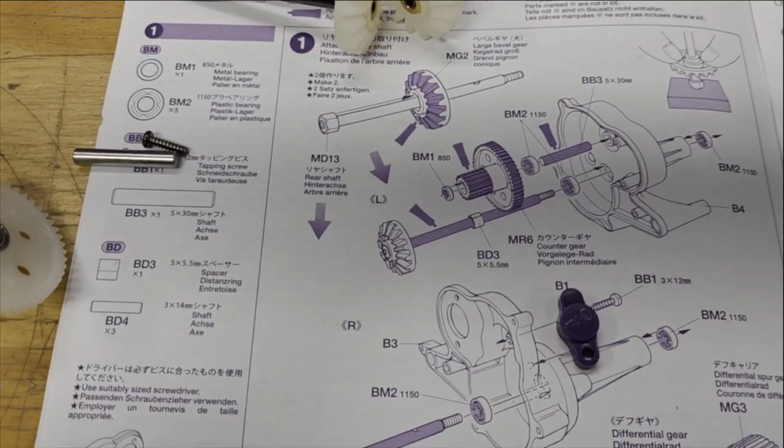All right guys, as we can see here, step 1 is fairly chock full of stuff here. So I went ahead, I want you to make 2 of these guys, which you get 2 and 2. This just slides on as a hex.

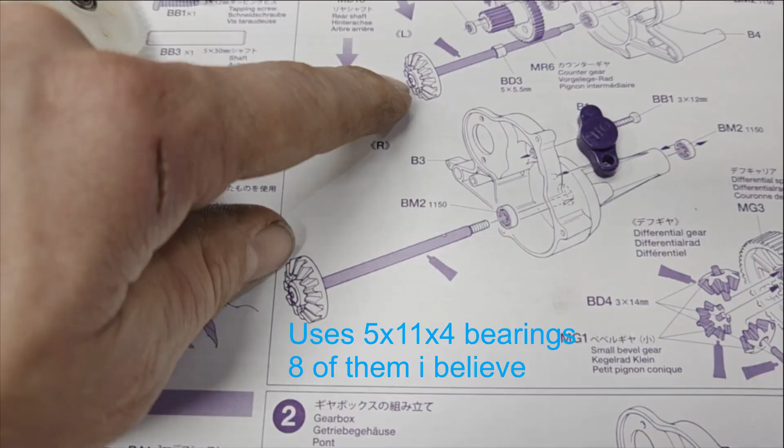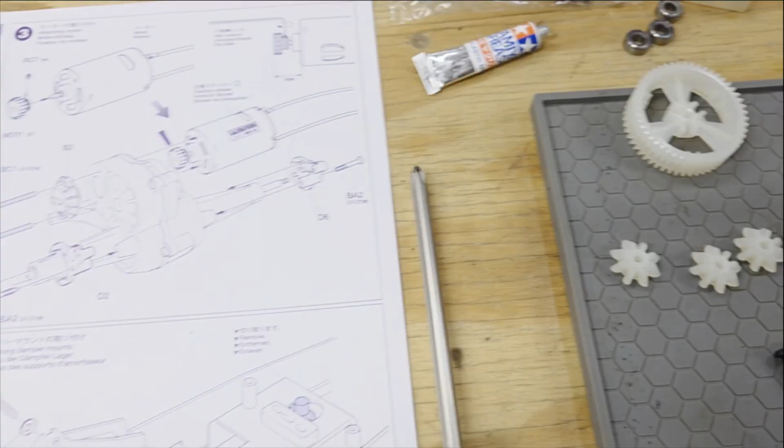2 of them, and you got your gearbox half. So I went ahead and just stuck my bearing in both ends. Comes with plastic bushings, but we threw bearings in there. Next we're going to put this pin in, this gear on. I got to find that spacer, and then this all slides together. And we'll throw in this diff, one which is this guy, bunch of cross pins and their spider gears. So let me get that kind of ready to put together, and I'll come back and show you it going together.

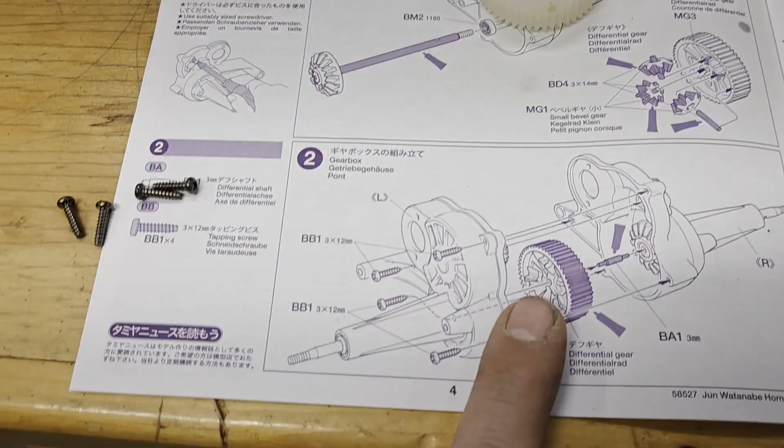All right guys, here you have it, we're getting ready to close up the gearbox. Make sure you put that guy in, he goes here. Our spacer goes behind that gear right there, the one we couldn't find earlier. Make sure you throw some grease on your gears. We got our screws ready for the next step, we'll get this guy going, and we get to throw a motor in already.

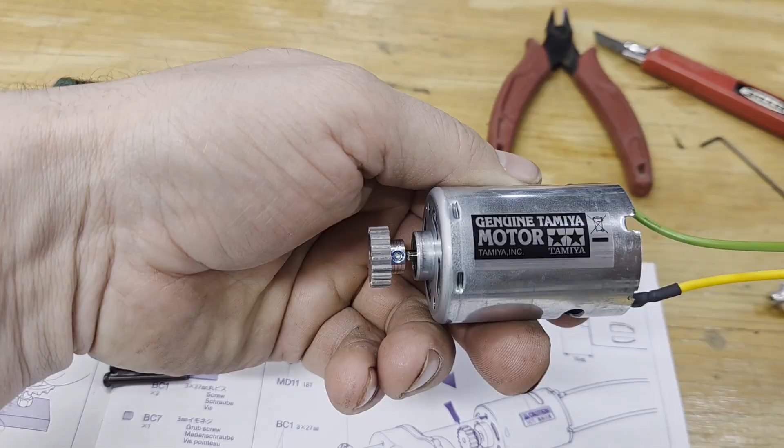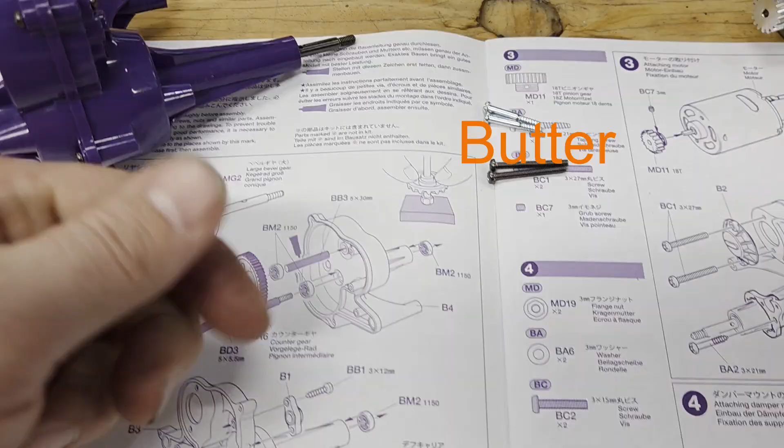Motor time. Got the pinion on. Remember to use your Loctite, and the setting they show you here for your measurement. Now's a great time to make sure this spins free before you stick the motor on. Ours does.

We got our parts laid out for the next step. We're gonna get this thrown together. And then we got, oh, what's this over here? Oh, that's not our channel. Why are you watching our channel? I know, production quality, it's not the best yet. We're getting there. What are you working on, Logan? Don't worry, I won't put you on the camera. I promise.

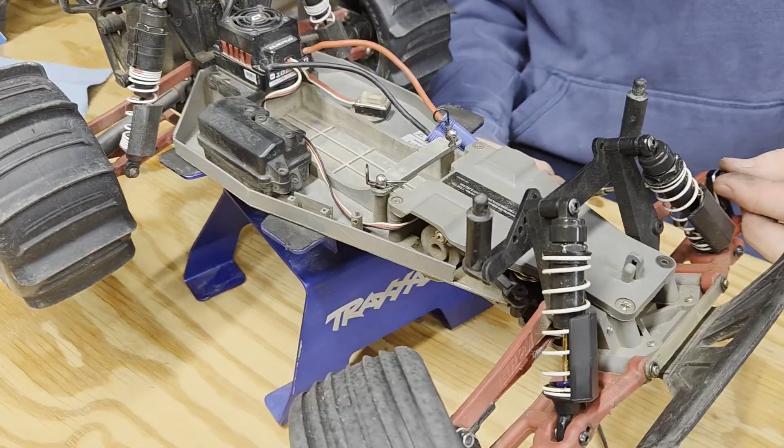Oh, that's not stock. That's not stock. That might be stock. And those aren't stock.

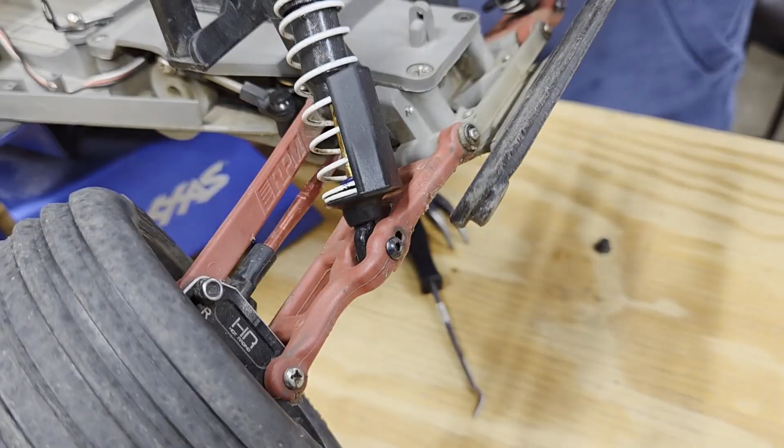Oh man, all right, let's get back. We'll get this motor mounted, then we start putting some spring-a-things on the back of the chassis. Let's roll.

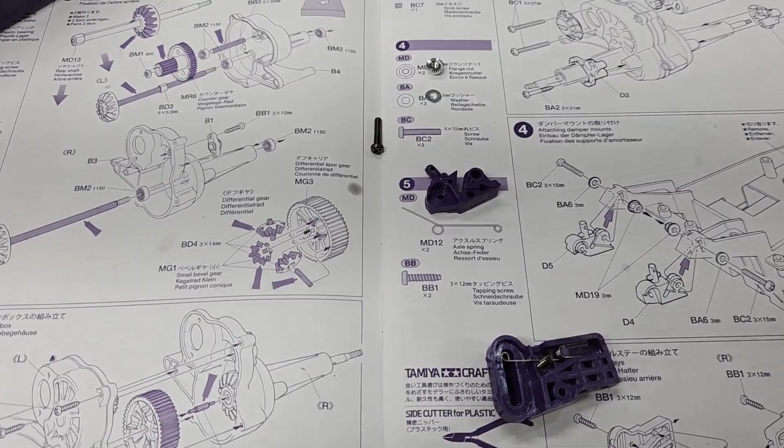All right guys, check it out. Got the motor mounted, looking good. We're coming down, these I think are the wing mounts going. I put one on, you can kind of see that guy right there. We'll stick him on here in a second.

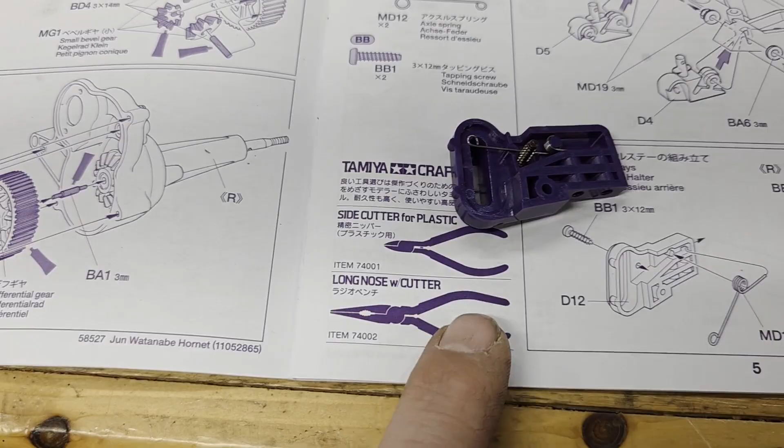And then you need to prepare these guys, your rear pivot mounts. Shows you springs up in there, and then once you put the screw in, you gotta flip the spring to the top of that. That's where we're at, so we're gonna go ahead and get that going, flip, get this other piece put on, and we'll see where we're at.

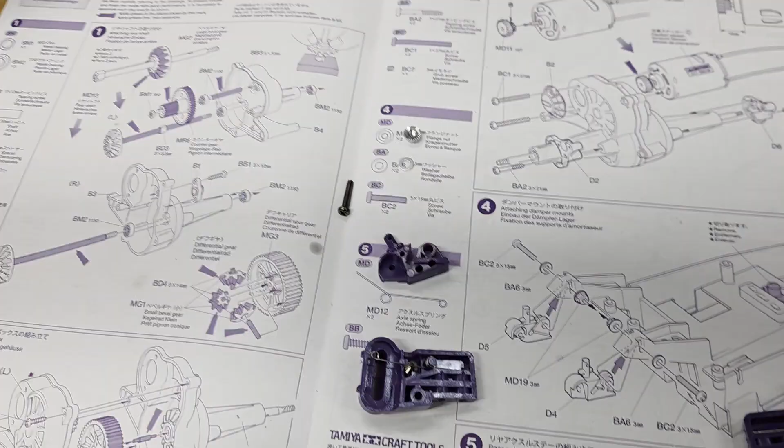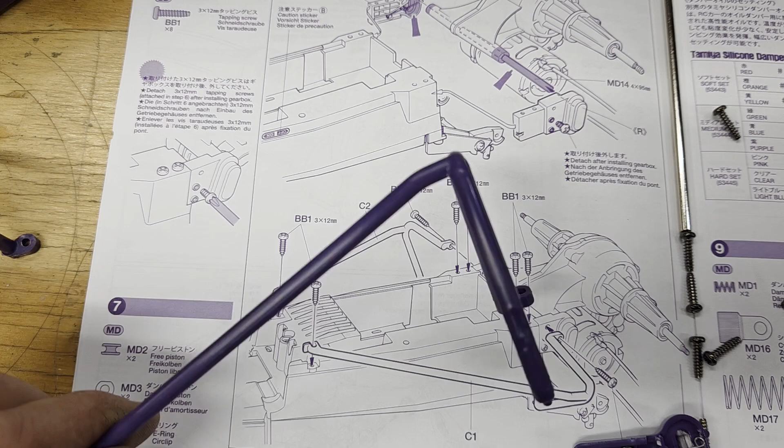Right on, check it out guys. Next page actually has a lot going on. Using our pieces with springs on both sides, and then our big pivot pin's gonna go through there. Make sure you grease him. And then same step, we get to add all our Nerf bars. We get to put a bunch of this together real quick. This will come together real fast right now.

All right guys, she is coming together. Got the rear end on. Kind of need 3 hands to do it. These have to be on, they capture your pivot pin. You can see our spring down here, which he'll do a little more work later. When you put it on, you got to pull your screw back out.

That one, because you're basically just holding the spring in place until you get it on, and then you're good to go. Make sure you put grease on there. Get your Nerf bars on, screws in. Looking like a car almost. Check it out, all right.

Next, we're going to do some shock work. So, see you in a minute.

All right guys, I go and do these shocks off camera. However, they are quite unique, so I thought I would do one on camera so you can kind of see what they are, follow along in case you're wondering how they need to go. I had to ask my assistant over here, he's not happy about it. So all right, let's check this out.

You start with a standard shock shaft, just like normal. You got E-clips, but you're using this little guy for your piston. He's just a solid part, nothing special. Got him put together, that's over here. You got this guy, which is unique - this is what was throwing me. Little brass guy.

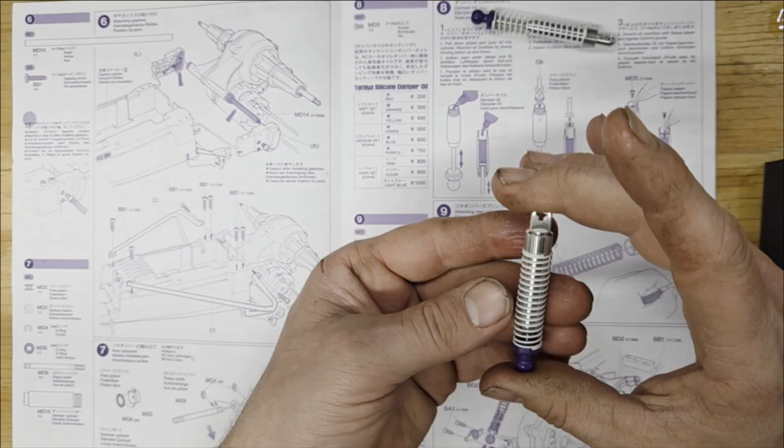So, pretty unique, interesting. I mean, I kind of assume it's going to leak up through there at some point, but it is what it is. And that goes through, and then we're going to come back. We're going to go ahead and get these attached on the rear of the vehicle so it's not flopping around.

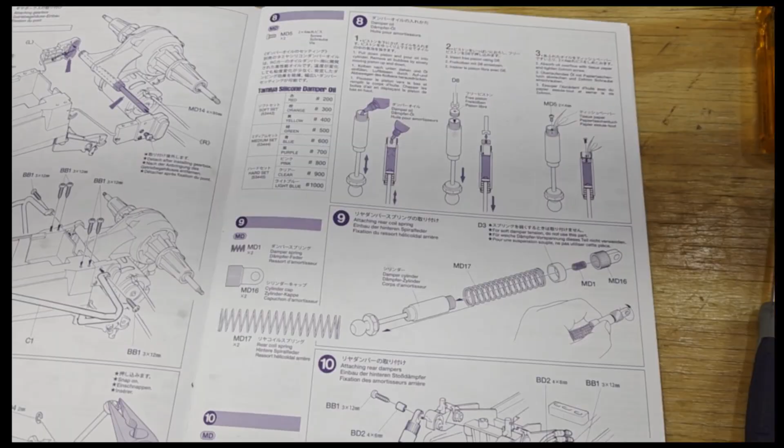All right, guys. Due to unfortunate circumstances, we have skipped a few steps and moved ahead a little bit. So we were going to throw on shocks onto the rear of the car when I left off, and we did that.

We have the metal captured piece here, which is kind of neat. I like that. A little bit of grease, like just a giant open ball cup.

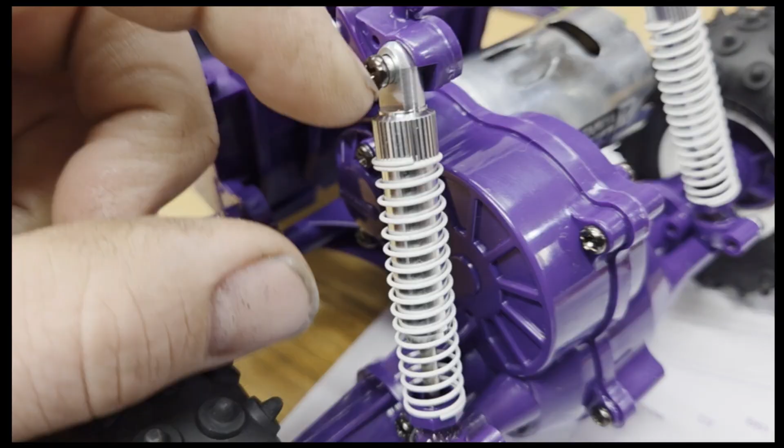I like it. On the top, you just have a little spacer that goes inside of there. It's a metal one. Dab of grease, slide your shock on.

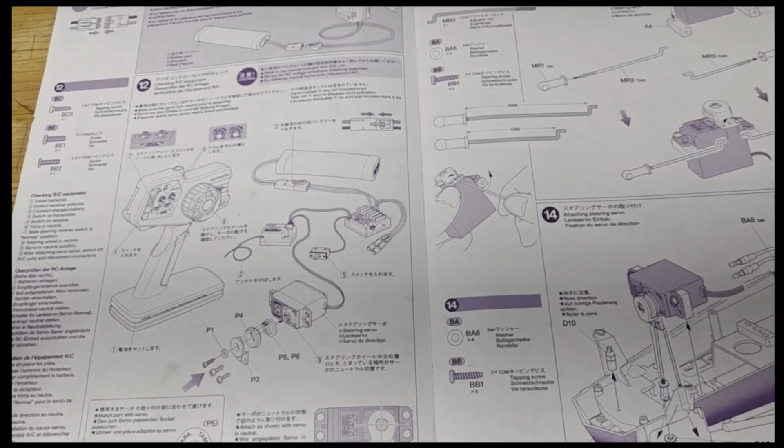He's on. So that's pretty cool. Once you get those guys put on, get this here. Then it's on to, hey, put your ESC, radio gear, servo, and all that in.

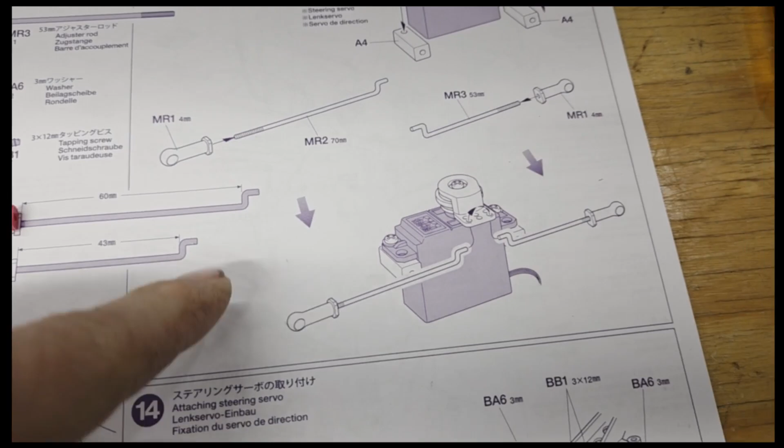We made our end links, or our steering link, sorry. We got one little ball cup, and then two, because your servo is off-centered, so you got a long one and a short one. Put on. Easy peasy. You can match them up to the diagram as you make them. Should be really close once you get that put together.

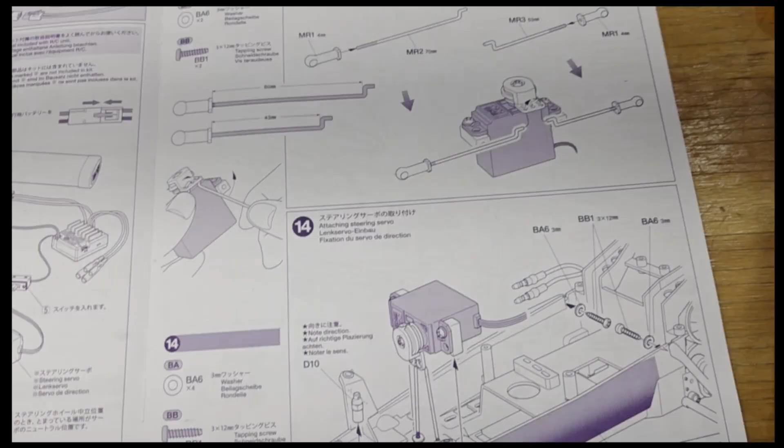So I got about to this step and realized the servo I had just wasn't right. So I had to go ahead and order me a servo. I didn't like the one. And then also, this kit did not come with an ESC. Other kits, to me, have had that little Hobby Wing brushed ESC. This one did not. No big deal. So I had to wait. So it's been a few days since the last little shoot.

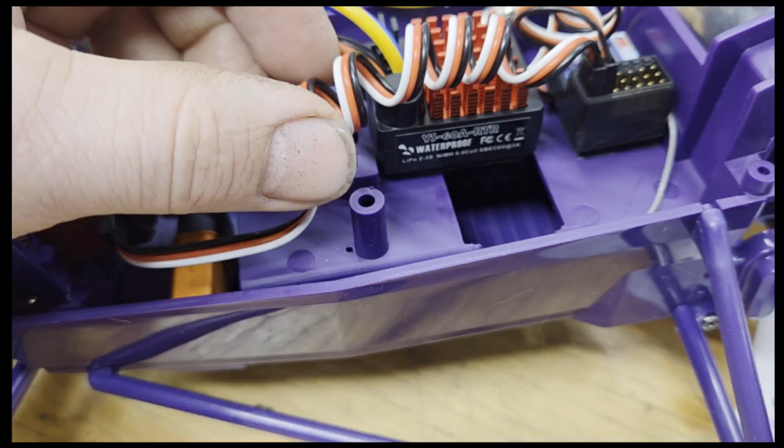So I went ahead, I just run my Fly Sky receiver in there, but this was an Amazon servo, just cheap, I think they're like $13 now. But a 270 degree, so I could get plenty of steering and set my endpoints. And this is, I think, just like a clone of a Hobby Wing. Had some weird name. It was like 20 bucks.

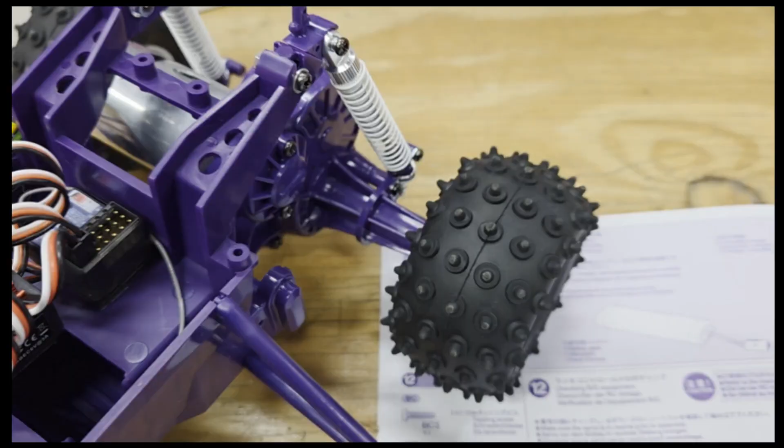But it just, you got your little jumpers, set your forward reverse type deal on your lipo. So that's all that was.

We went ahead, all you gotta do is put your little blocks on, put that guy together. You pick your rear mounting plate with your thread, servo saver, and then this little offset front piece. There's a straight one and an offset one.

I did run into an issue there. For whatever reason, this servo, let me see if you can... see if I can show you. Look down in here, there's a slot. That's where the screw for this post is supposed to go.

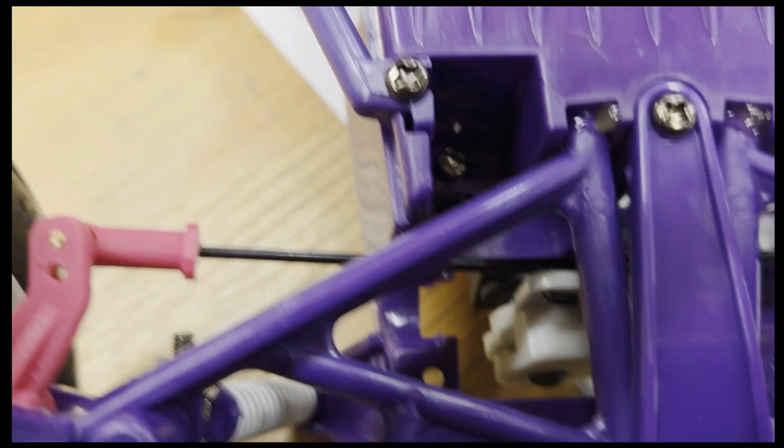There we go, I'll show you. Let's see here, that slot. We're gonna get light. There it is, there's the slot.

So with it there, in front of my servo, this thing was actually hitting the front of the chassis. Sorry, and that was no bueno. Like I could have notched this out, but then I didn't know when it turned if the end of it was going to catch over here or not.

So I just went ahead and moved back into that little groove and drilled a hole and put my screws up through there. So, just one of them things. I don't know, so maybe it's probably just the make of the servo, the sizing of it. That's tight. I know there's a gap, but it's tight.

So with that being said, that's what we had to do. That's what you gotta do. So there's that. And then also, here, let's just follow along and I'll kind of tell you what we got.

Yeah, see the screws come up through the bottom and those slots into the posts. And then throw your screws in the side Nerf bars. Since you got it over, right there. So those are all in.

Oh, this guy, yet again, same as my last Tamiya build, you don't have these giant switches that they used to come with, right? Like most ESCs have a little micro switch. Now they're tiny. That one came with one. I cut it off because I don't care.

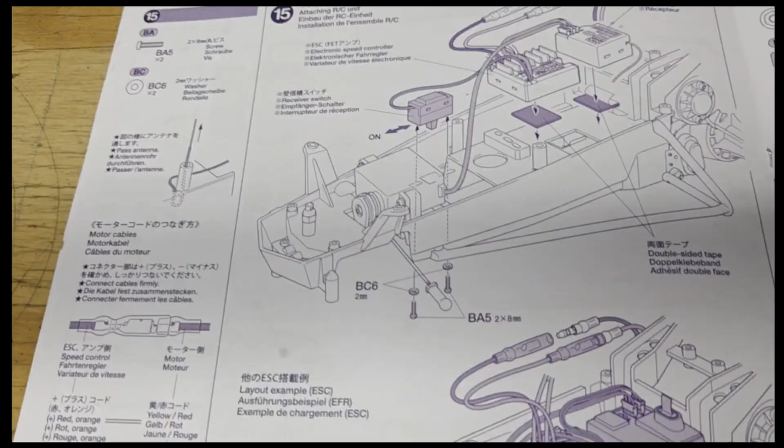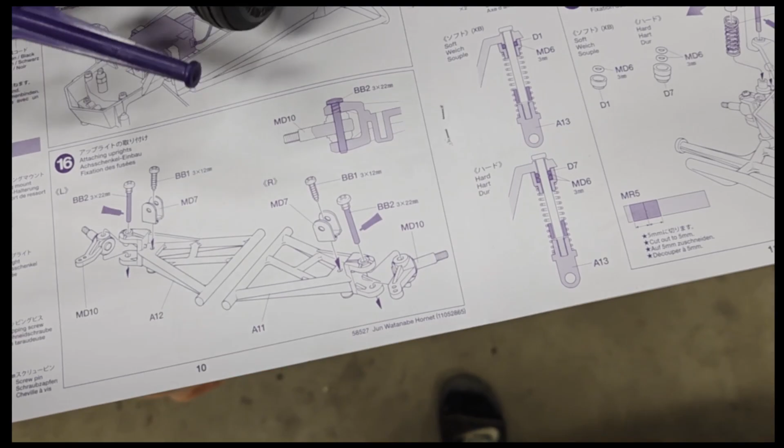Next was the front suspension, which is pretty straightforward. It actually has you assembling these. How does that lay down? Oh yeah, they were facing me. So via the diagram, it's like looking at them from the back of the car.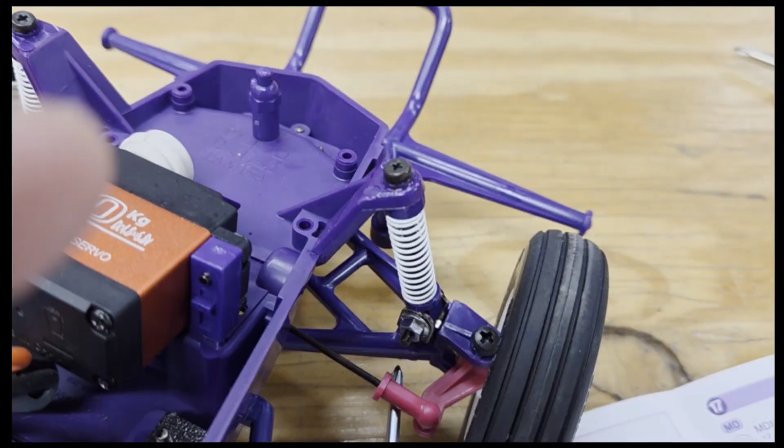This one I didn't have any issues as far as parts not fitting and things like that. It just has you throw on this lower mount, right in here, just a U shape. I think I'm on the CW01, the lunchbox chassis parts - see those lower perches? Same with this A-arm design, I think it's on the lunchbox and Midnight Pumpkin.

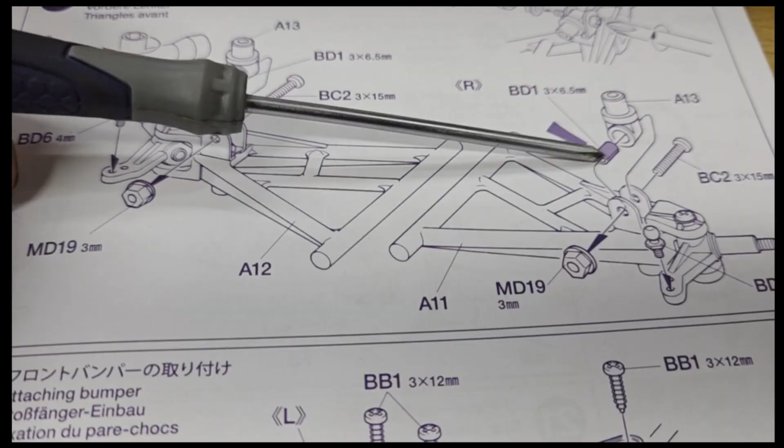And then yeah, we just throw our pin down, put our steering block on, dab of grease on some of those components. And then, yeah, this lower shock mount/perch where the bushing goes in there together - little baby ball stud, that's all of these parts here. This lower mount, there's a bushing in there, then you put your little ball stud right in there. And they're tiny.

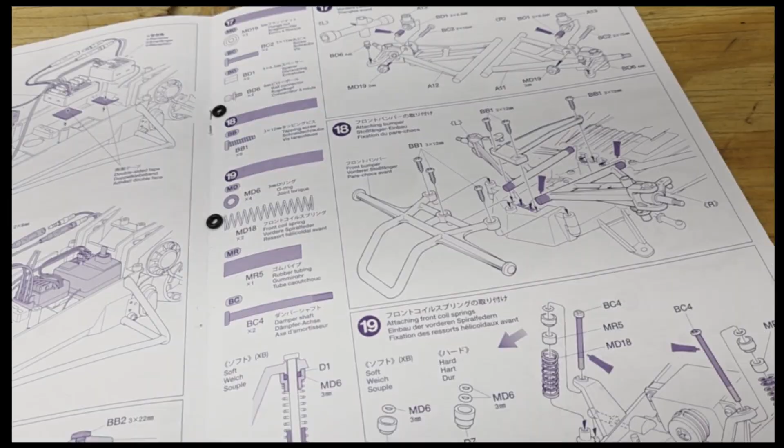And at that point was the flip over. There you go, then your assembled A-arm gets flipped. Stick one end in there - no one's captured under the front of the little skid. Three screws, and then you throw your bumper on, three more screws.

So yeah, I got quite a bit of this done off camera. I got excited, that was my fault, I apologize. But the bottom's on, so you flip her back over.

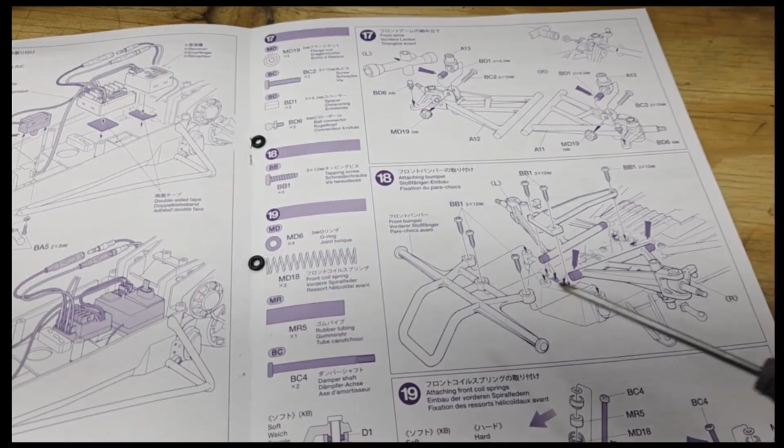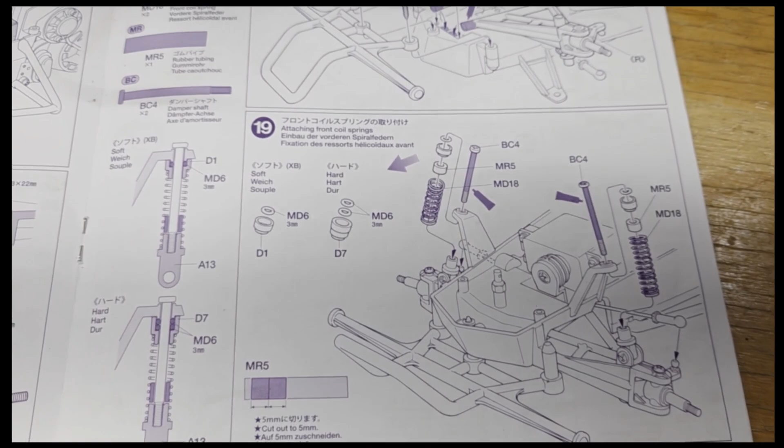Bang, bang, boom. And then these were another unique one - actually I've never done a shock like that, a pogo shock, spring 'em a thing. I like spring 'em a thing, that's about right. When you watch them drive around, you think Dr. Seuss or something, man, they just crack you up.

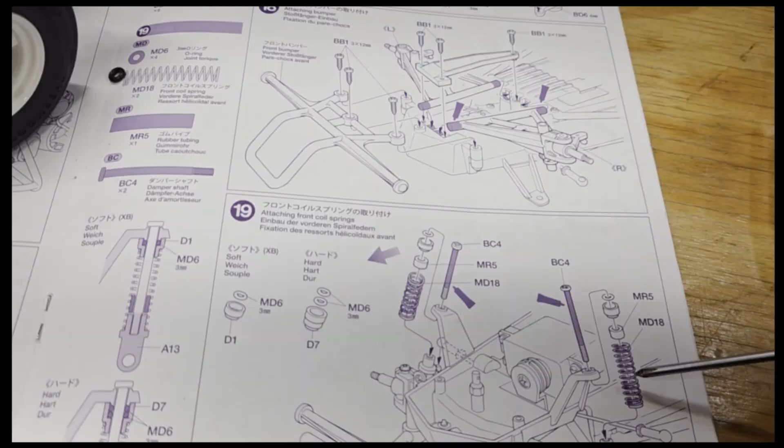But so this one, it's very unique. This is actually a rubber piece that you get - they give you a piece of rubber tubing, you cut it to the size you want, like a big bump stop inside the shock. But these don't get pre-assembled. You literally shove shaft into that lower perch I told you about, slide the spring over it, put your piece of rubber tubing inside the spring. This is your top captured piece, which has an O-ring in it to help slow it down.

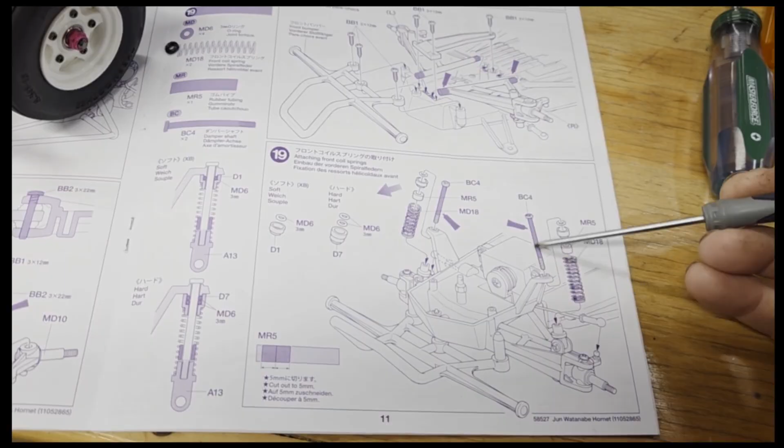And then you put some lube all over your shock shaft, I guess you want to call it. I'll let you see that so you kind of see what's up. You look in there, maybe not, let me touch stuff - right in the middle there, that's the top of that rubber piece. It's just sitting in there on top of this perch. There's the lower part. Oh, come on. Oh, there we go, there we go. There it is.

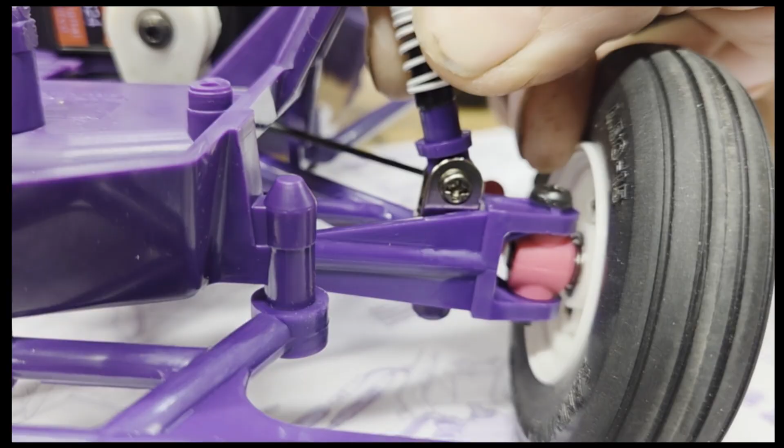And then this is your upper cup part right here, there's the O-ring in it. They look a lot like this piece right here, shove your O-ring in there. This one is the one that takes 2, so you can make it stiffer. This one only takes the 1.

And then the pogo style, they boing up. Sometimes they get stuck, sometimes you get them broke free. You can see I got a good amount of goop on there. Yeah, she's gonna take some cleaning up and tuning to get that looking good and working smooth. But that's how she be.

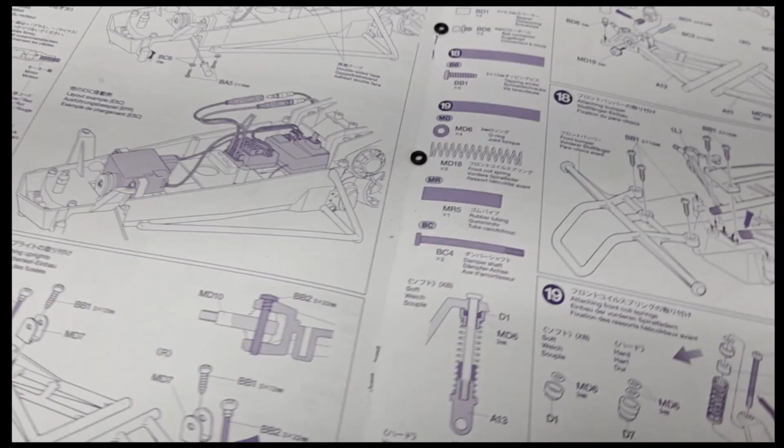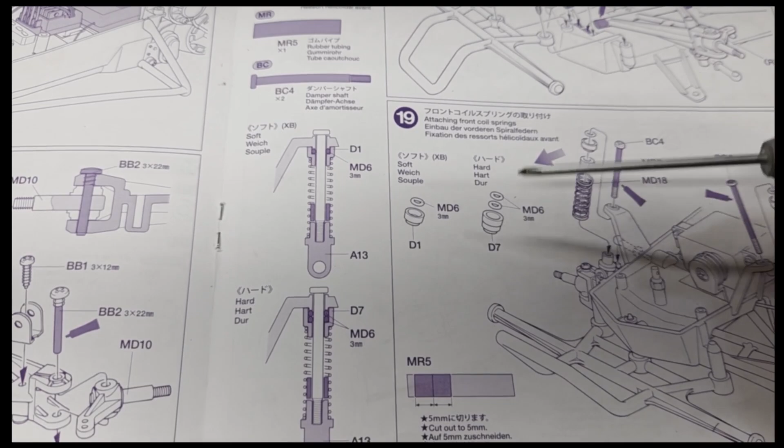And then, excuse me, here you go. That's the one I put in - 1 O-ring, soft. And you have the option of doing a double, which maybe if it moved nice and smooth you could use a harder one, but it seems like the plastic parts aren't gonna hold up too well with that kind of abuse.

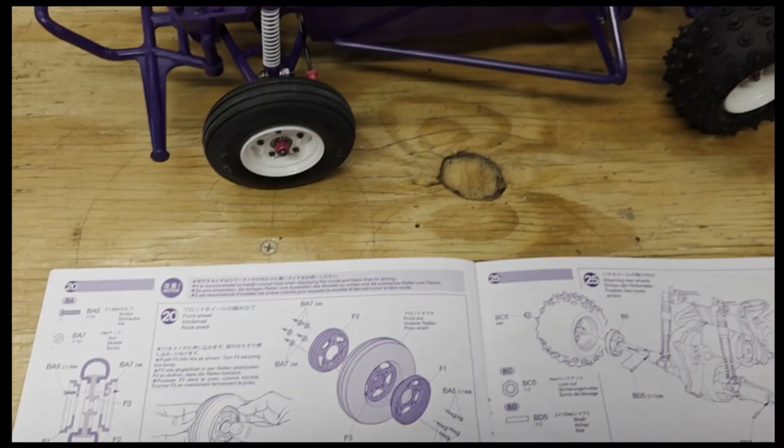And then, as you know on this channel, we love putting tires on stuff. So I was getting close, I was really froggy here. So you got your 3-piece rims on this.

Actually, I have them in black still. So these are 4 rims - each parts tree has a front and a rear, there's 2 of them, so you got front, rear. Easy peasy. So it's a beadlock style.

You have an inner and an outer, and then your center beadlocking part. If you look, there's a center beadlock - it's real thick, it's got the ribs, it's like the bulk of the wheel mass or the rim mass here. So those are actually really hard to get into your tires. Tell you what, I'm going to pull one out and show you how to get it in there, just because some people have a lot of issues. They're a very tight fit.

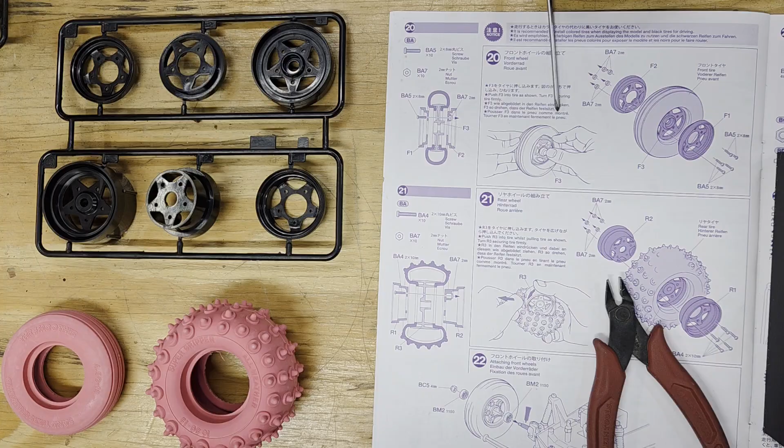So one second. All right guys, pulled out a front and a rear, and then opened the bag. I had 2 parts trees, so we'll pull out this front one here. Remember, good set of flush cuts doing these kits.

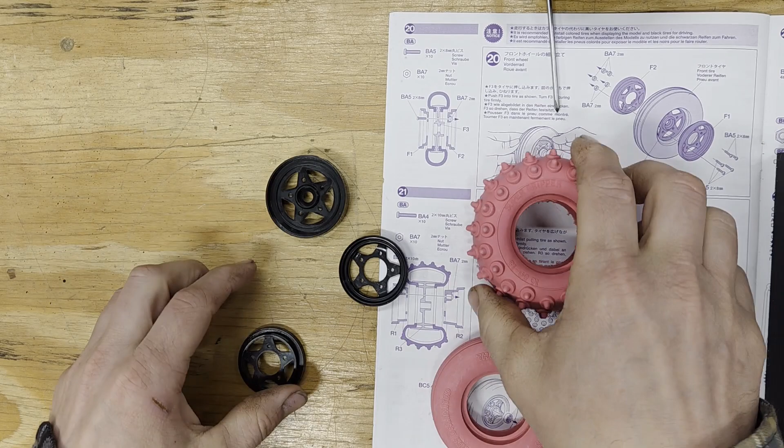There we go, the rear is the same as the front. Two skinny guys, front and rear. The front, as you can see, has the same size hole but doesn't have any of the extras. This one has the recesses already in for the nut to go in when you put it together.

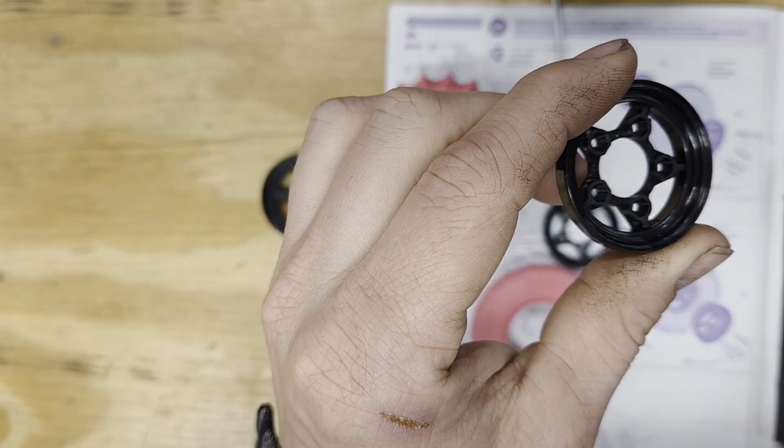Fun to see, let me just show you one. If I can do this without dropping it... there you go, see? It just auto retains all your nuts for you when you go to put that together. I lost a lot of those before figuring that out - do that over a mat, I tell you what.

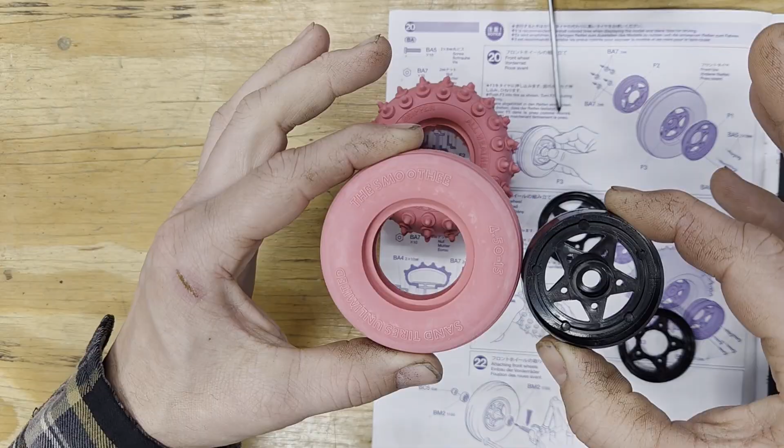As you can see, it's definitely quite the difference. They're hard to get, and if you're just trying to do this, it's cold out here today too, so this is going to be a little more difficult.

But anyways, start like so, you can really kind of shove that in there, right? What I'm going to do is try to pull this front lip down over that tire, just kind of pinch and pop it out over. Try to get it split, so I'm making that fat.

Should be getting close, I'm going to start turning that inside the tire. You're going to work that lip over that rim, that side too, same thing, a little at a time. Woo! Bam, brother. Bam! Oh, bam! Here we go.

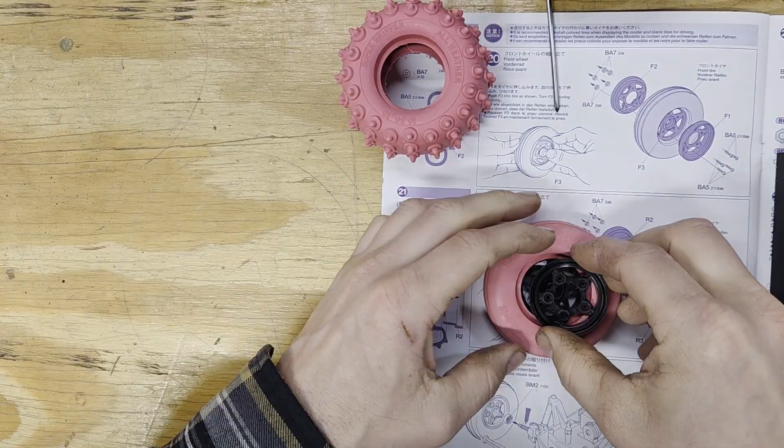So then you're just going to line that one up, give it a wiggle, same on the back side, y'all. You can see, I got to see here. There we go. A couple squishes, wiggle, wiggle.

Then you put your nut in and your screws and start slowly tightening them all up.

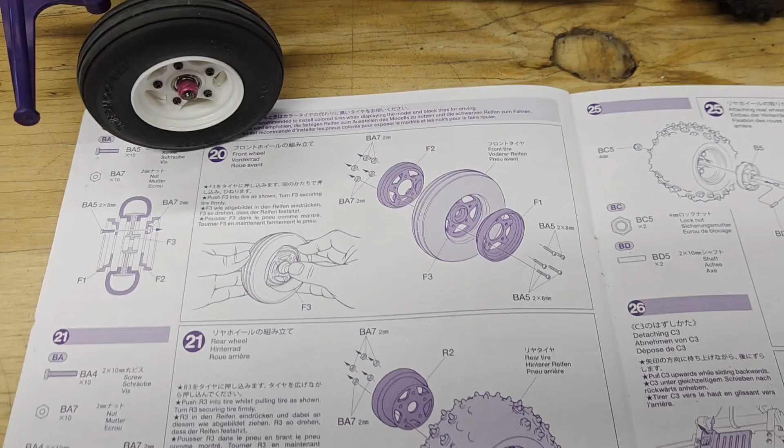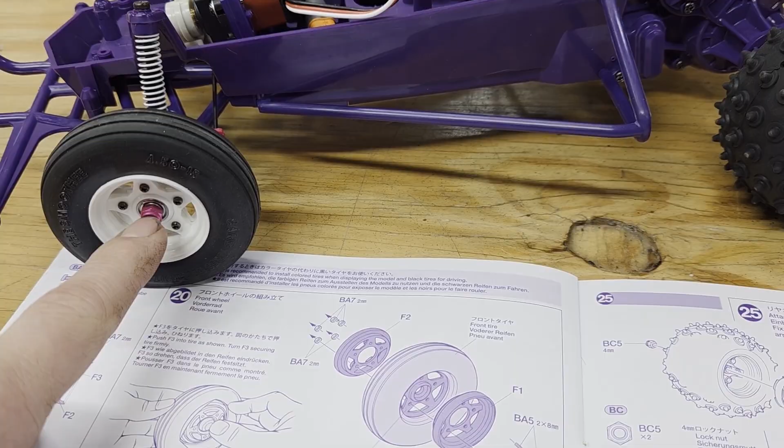So with those done, I went ahead and did the white with black tires for my car. As you can see, the next step after putting the rims and tires together, on the fronts you put your bearings in. That's, I want to say, 5 by 11 by 4, whatever that Traxxas front bearing was. Anyways, get 2 in there, 2 in there, and that's it for bearings on the car.

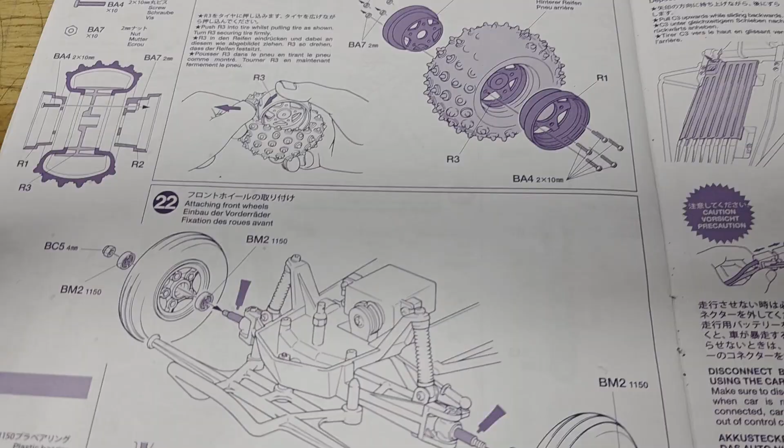These are the plastic bushings, so I don't put anything on there. Also, you may want to throw on some shims, maybe. That's pretty tight - the rear, however, had a little bit of slop going in and out.

Let's see if I can convey it, get real close. You may be able to get one of those shim PTFE washers in there behind the cross pin, but that's going to be personal preference - it probably doesn't need it. Depends how much you want to get into it.

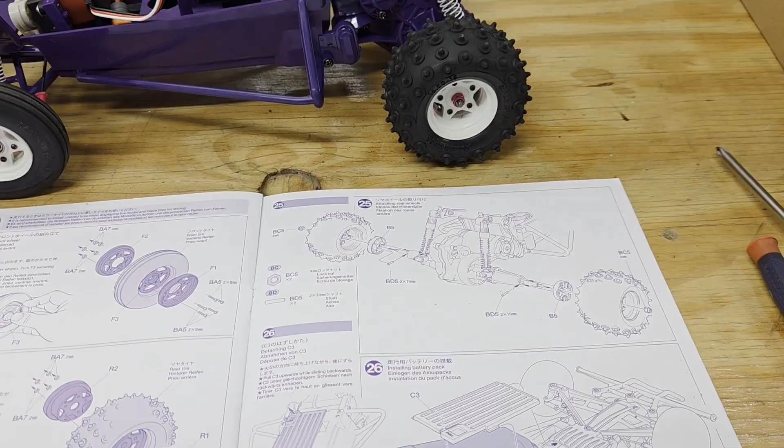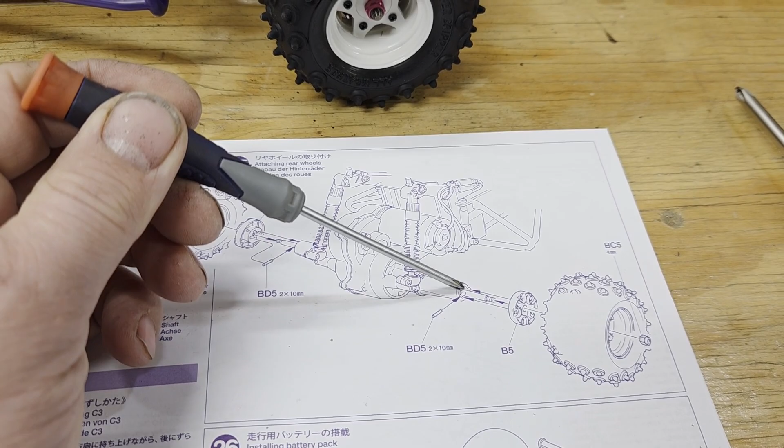So there you be - front tires on with the awesome pink nuts that come in the kit. And then obviously we threw our rears on, we threw our hub in, cross pin hub. Like I was talking, that shim, that PTFE washer, sticks right behind your cross pin to take a little slop out if you got too much.

And then it's like, hey, charge a battery and throw it in, even though you gotta cut out a body and paint it, whatever - battery door. I had to trim my battery door just a touch as well.

I don't know if I can do this one-handed. Oh yeah, so the last little snap shut - oop, sorry, my fingers there. This guy, trying to kind of see it, that little tab there. I don't know, I just had to cut it with a knife, just put a little bevel on it so it would snap up in.

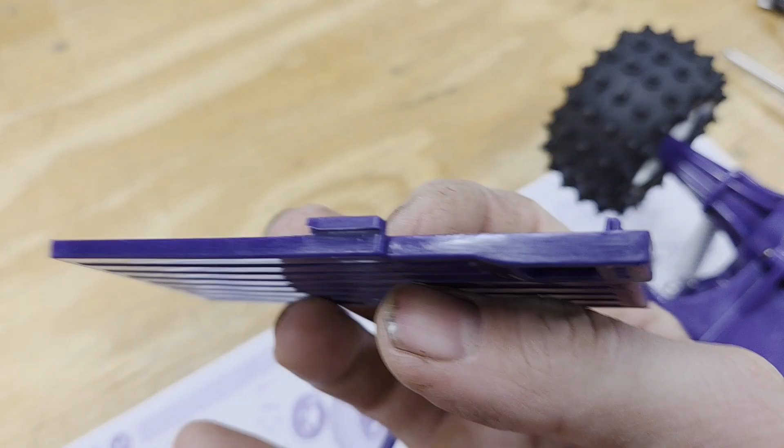It slides in like that, and it snaps down flush. That little tab with circles did not want to just pop down in there for me, so I just cut just the tiniest bit right off that edge. Sit down on there. One hand, bam, now she pops in nice and good. Yeah, before that would stay up, but no big deal.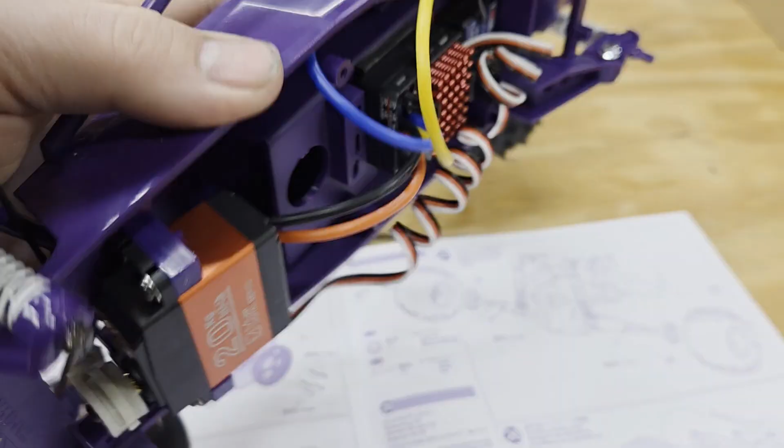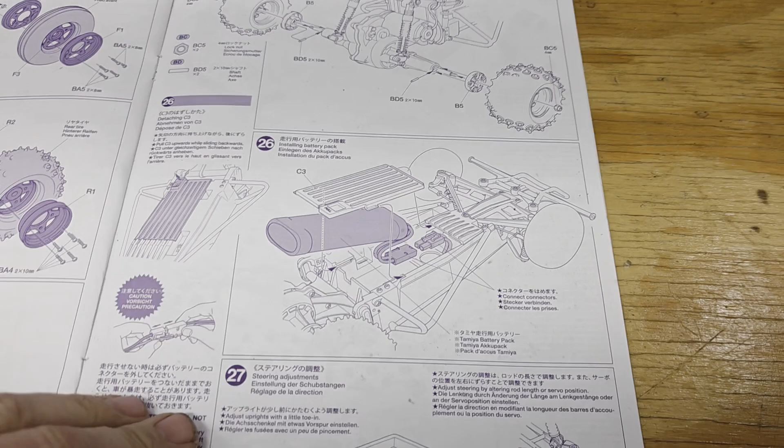So that, why did it feel like I moved something? I don't know. All right, we're moving right through here, so there's a lot of camera wobble and stuff like that, so I don't have it mounted as I'm doing this, obviously. Whew, this is awesome.

So another upgrade over your Grasshopper type cars - this is a Lexan body, which is pretty rad, and it's also body clips, so you're not like trying to unscrew everything just to get back in the car to work on something. Huge, right? I mean...

Just wow, love it. And we're not doing the cow - sorry, we could, but I decided not to. I am gonna keep it simple, might be too much. We're gonna find out, but I'll show you here in a second. We did do a little bit of painting.

We have to do some driver assembly. Haven't even started on that, which for today on this car we're just gonna do probably just shooting black real quick. Maybe do some touch-ups. I don't know, maybe just leave it white for now.

I don't know, I like looking through the windows and seeing the electrics. So Lexan scissors, chop out this body. And then we had to cut the wing out, which we cut out. Don't know why I want to paint that just yet.

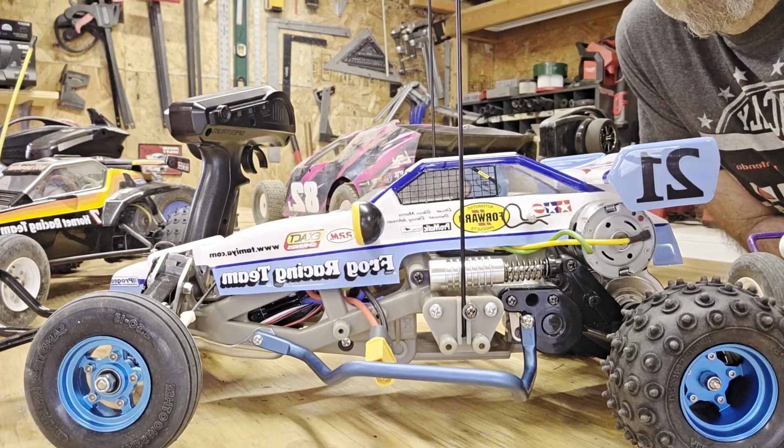Alright guys, you just seen us out running these Hornets. What a blast these cars were. I'd like to thank Jody, he's the one that got me this Hornet. He's got the OG over here, check that guy out, he's got his fingers all over it, but putting my body on, it's pretty rad, not to mention rad. Look here, look at that thing, the frog, the frog, yet to run.

I might keep it that way, it's too pretty. Aw, look at that.

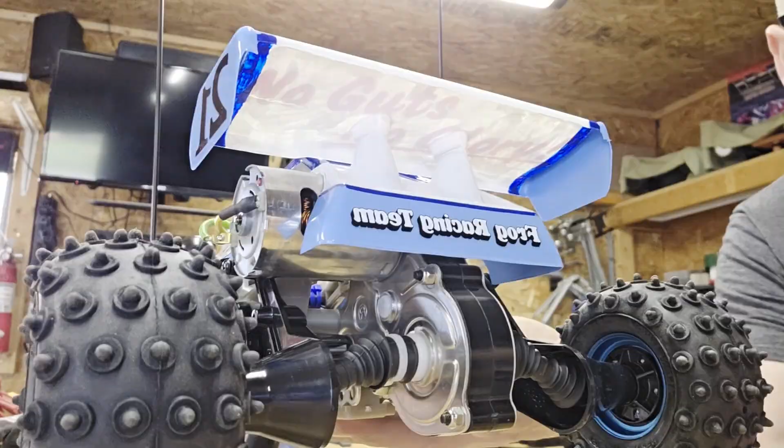I'm pretty sure you did the whole build on your channel, right? Yeah, Flying Fortress RC over there. Check out that rear, oh my gosh. I can't do this, there it is. That is awesome. I never realized how unique all these Tamiyas are from one another, you know?

Like, these are awesome, we only got minor damage. By that I mean dirt on the sticker. I'm pretty sure that's it. And they're a lot faster than I thought they were going to be. Let me hit this button. There we go, dude, I would love, look at that, to do a monster beetle class. Oh good lord, I need a monster beetle now. Yeah.